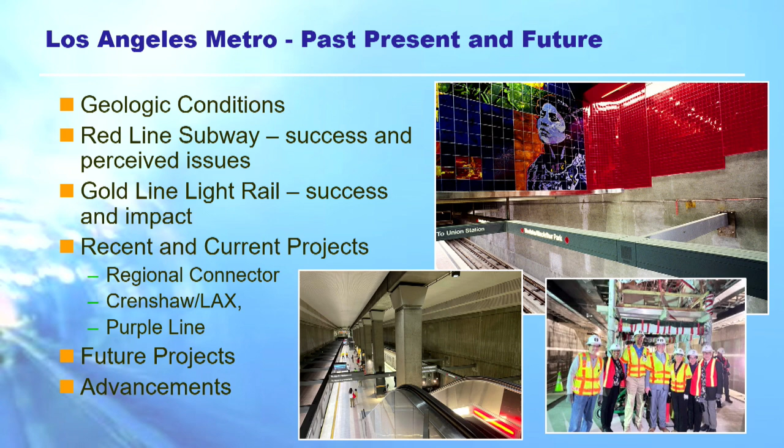Okay, Matthew. Okay, let's get cracking. We're going to talk about LA Metro, past, present and future, a bit about the geology, go back to the 80s with the Red Line, to the noughties with the Gold Line, and then the 2010s, 2020 with Regional Connector, Crenshaw and Purple Line, which are recent and current projects. A little bit of chit-chat about future projects, so you can put it down to a bit of BD tonight. And then some of the advancements and things that we've learned from our 40-year program.

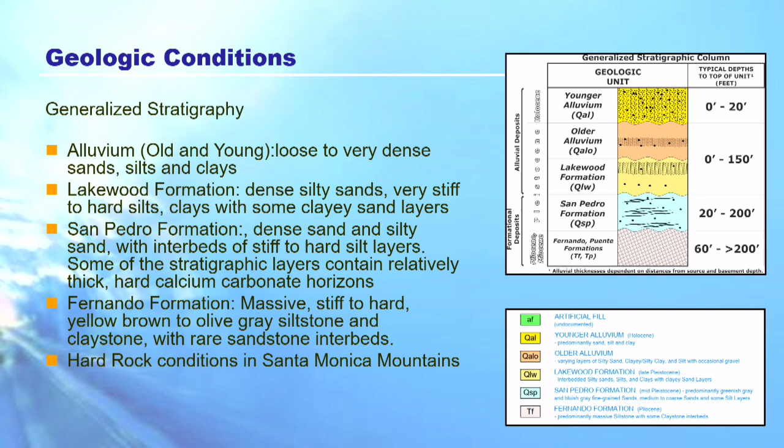LA actually has quite a big history of tunneling over the last 150 years for railroad. Here we go, railroad, transit. Where are we? There. Freeways, highways, and water and sewers. So it's not a new thing to us.

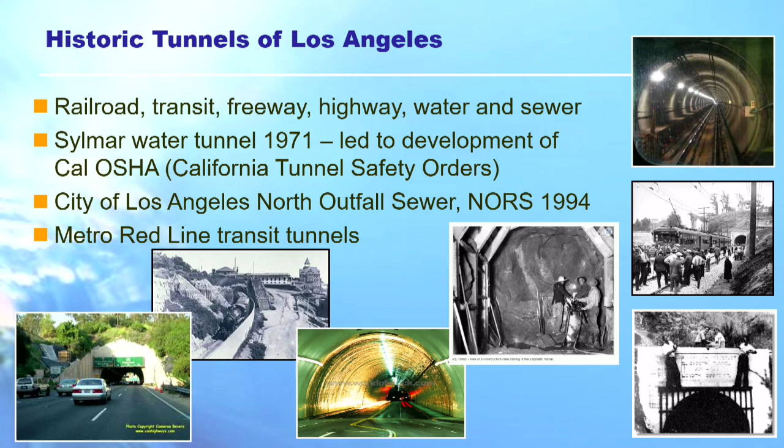Also, Los Angeles, the reason why it's so spread out is not the freeways. Again, you can see the mountains and then the west side and then the San Fernando Valley. But you can see that the red and the blue lines are railroads, either the streetcar type thing, or actually this is a 4-track electric commuter rail. And it originated from the horse-drawn tram with a particularly lazy horse there.

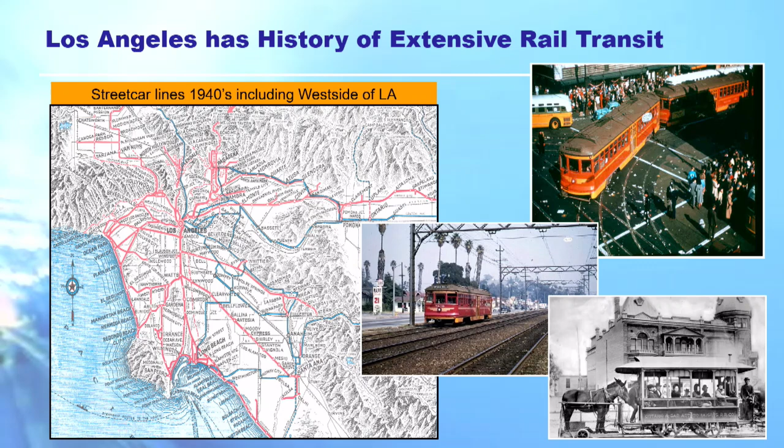And as with all good things, when the system had been completely abandoned, there were no tracks left, we kind of thought about how to put them back again, back in the 60s. And, I can't think. Amanda's going to talk about some sensible stuff now.

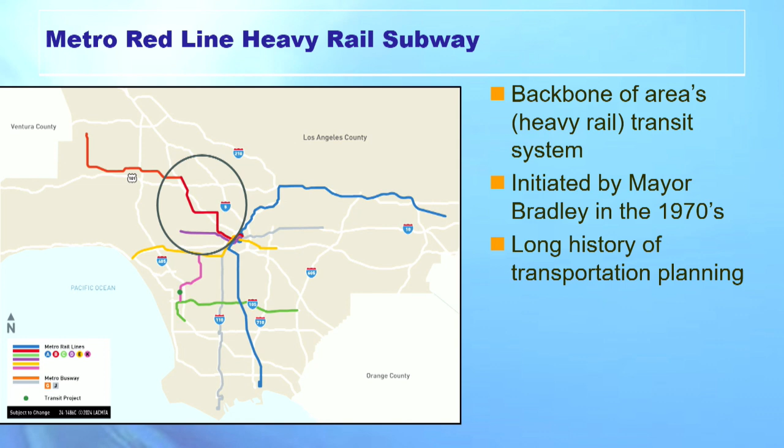Amanda. Started by Mayor Bradley in the 1970s. If anybody flies into Los Angeles, they fly into the Bradley terminal. He was a promoter of transit. But there is actually a long history of planning for the metro systems. There are a lot of stops and starts for funding.

They finally came up with a new approach where the state created the Los Angeles County Transportation Commission to sort of coordinate all of the municipal operators and have more efficient funding. So in 1980, the voters of Los Angeles actually voted for a half-cent sales tax to help fund transit projects.

And a locally preferred alternative emerged from downtown Los Angeles along Wilshire Boulevard up Fairfax and out through the Santa Monica Mountains to the San Fernando Valley and actually connect these population centers.

There's no screen here. All right, yeah. Do you know about this, Gabor? There's no screen. So I'll keep going though while they repair that.

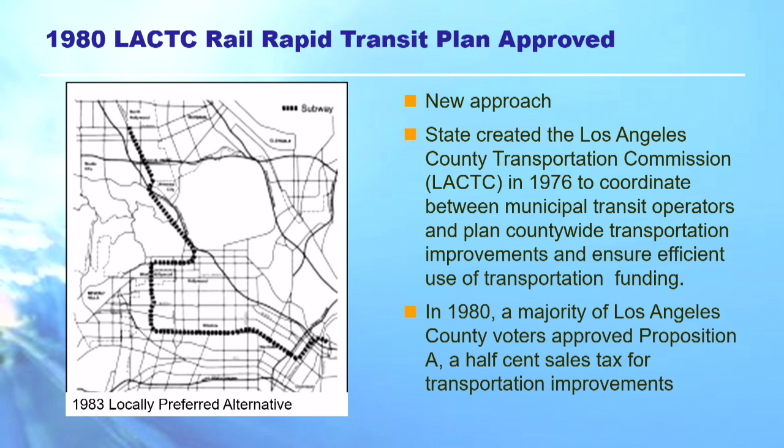But this alignment was not really to be in that form due to the presence of gases underground. Yeah. There are many oil fields in Southern California. Actually, at the turn of the 20th century, it was one of the major oil producing cities in the world. And there's one particular area along Wilshire Boulevard that's very famous called the La Brea Tar Pits. And in this area, oil actually seeps out of the ground.

Anyway, in this tar pit area, mammals from the ice ages would come, they were attracted to the tar thinking it was water, get in there, get stuck, and actually perish. And so there are many, many prehistoric ice age fossils that are being recovered from these tar pits. There's actually a museum that's a famous attraction. You could go see the fossil remains.

But because of a non-metro related incident in 1985, the alignment had to be realigned around this tar pit area. The incident was a methane explosion under a department store slab. Nobody was killed, but it was quite sensational. And as a result of that, the city of Los Angeles created a methane zone, which you can see, here's the explosion area, the tar pit area, and the alignment had to be rerouted around that methane zone.

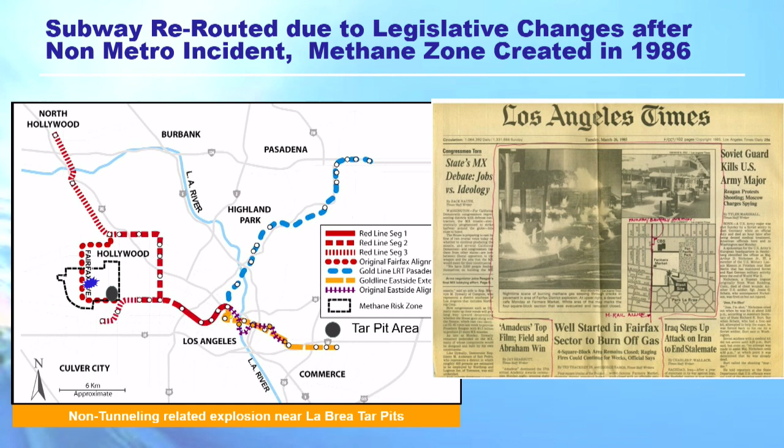And the United States Congress actually voted legislation to not fund any metros in that zone. So, not going on Wilshire Boulevard in 1986. The original methane zone was about 1.5 miles by 1 mile square. Sorry about the American units, but at least you guys have heard of it.

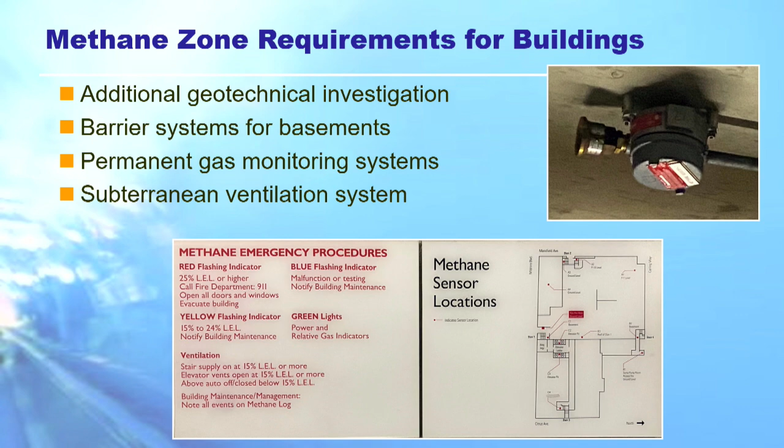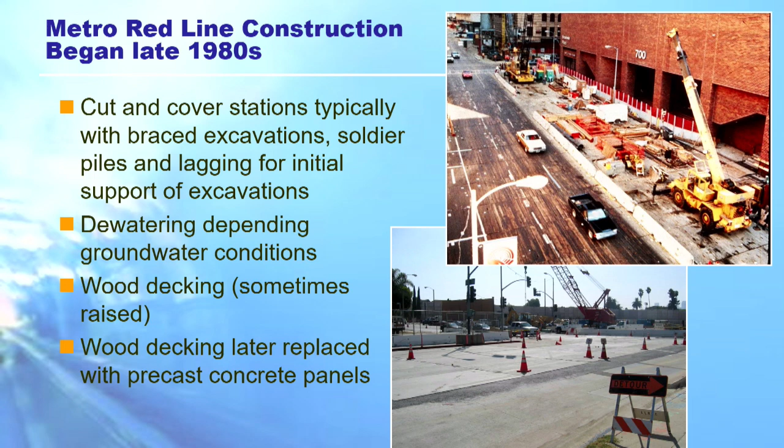So Metro Red Line construction began in the 1980s. It was mostly cut and cover stations, braced excavations, soldier piles and lagging, dewatering depending on the groundwater conditions at the station locations. They used wood decking over the open cuts. This was not popular with drivers. Sometimes the decking was raised to reduce utility relocations. So that was later replaced with precast concrete panels.

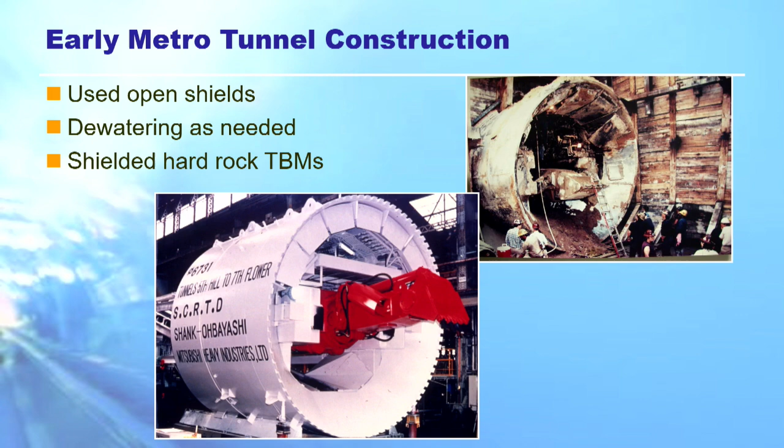Tunnel construction used open shields, except through the Santa Monica Mountains where hard rock TBMs were used. It's a photo of the rock machines. These were named Thelma and Louise to give you an idea of the time frame of this tunneling. And the initial ground support was rock bolts and sometimes steel ribs. And the final lining was

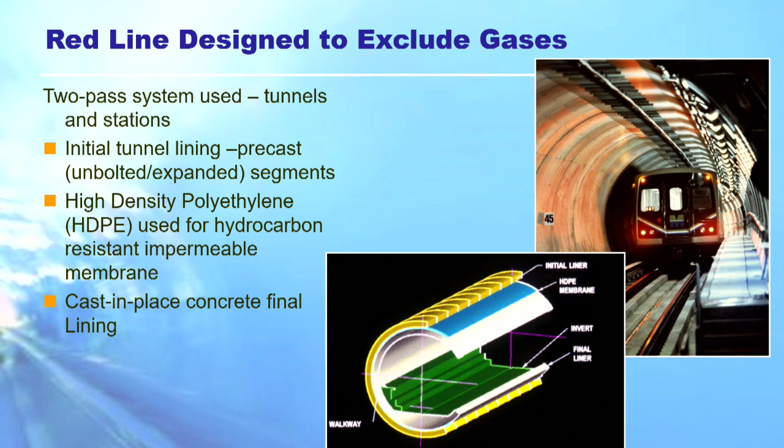cast-in-place concrete. So we mentioned methane in the ground, so we had a design for mitigating methane. The Red Line design included a two-pass system, which was an initial precast concrete segment, expanded lining, no bolts, followed by a high-density polyethylene liner. That's called HDPE, and that's used because it's methane resistant. A lot of testing was done to confirm that, followed by a cast-in-place concrete lining. So we're basically sealing the tunnel.

For tunnel construction in gassy ground, and I was happy to see Donald Lamont here too tonight, we follow these California safety orders that we mentioned. These safety orders require that methane has to be diluted to less than 5% of the lower explosive limit. There has to be continuous monitoring during tunneling, and equipment has to be approved by MSHA, the Mine Safety and Health Administration, a federal agency. And the equipment must be certified to be intrinsically safe or non-sparking.

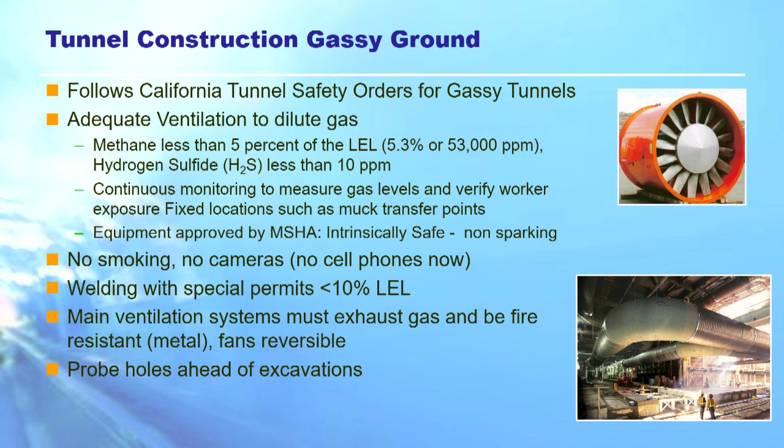It should go without saying that there's no smoking allowed in the tunnel. You'd be surprised. But also no cameras, no cell phones, unless they have special covers. The main ventilation systems have to exhaust gas and be made of rigid metal. And most of the time we have to maintain a probe hole ahead of the tunnel face unless a variance can be obtained from Cal OSHA.

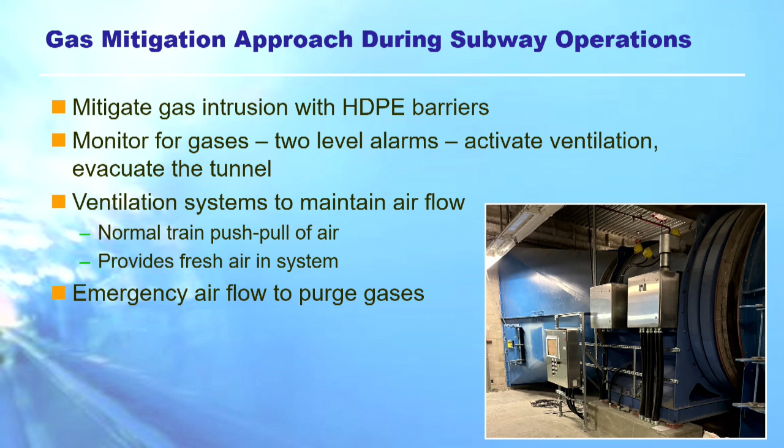So during operations, some similar mitigation approaches, I mentioned the HDPE barriers. We also have continuous monitoring for methane and hydrogen sulphide gases in the tunnel. There are alarm levels for a certain percentage of the lower explosive limit, and then fans are activated if they detect, I think it's 10 parts per million. And then at a higher level, the tunnels have to be evacuated. Normal ventilation from the train push and pull keeps any small amounts of gas diluted to acceptable levels. And of course, there are emergency fans if there are fires or higher gas levels.

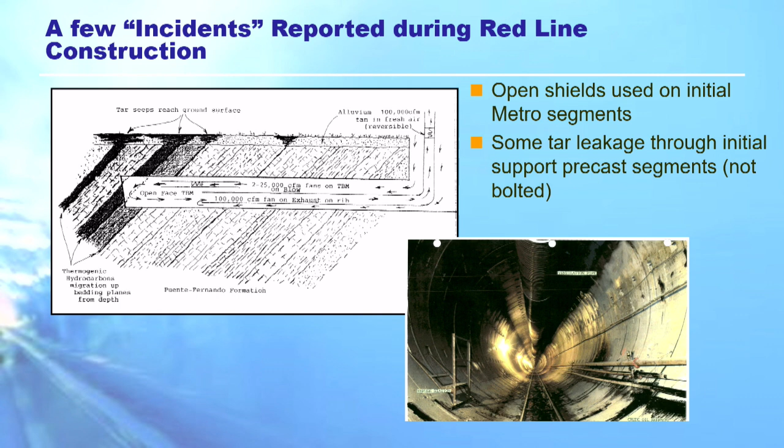HDPE is also used for the station barrier systems, and welds have to be tested extensively to make sure there are no breaches in the lining. So spark testing or vacuum testing is used on those welds. There were a few incidents reported during the Red Line, so you can see this is the same sketch. But generally speaking, things went well. In this case, there was actually some tar that leaked through those initial precast segments in a section of the tunnel just west of downtown Los Angeles.

Other challenges from geology include earthquakes. Metro developed a two-level approach for seismic design: an operating design earthquake, which has a 50% chance of occurring in 100 years, and the structure must be designed to have no damage and be able to go back into immediate operation after a brief inspection. And then there's a maximum design earthquake, which is a larger earthquake or more ground deformation, with lower probability of occurrence though. In this case, the structure must be designed to maintain life safety, but may be repaired.

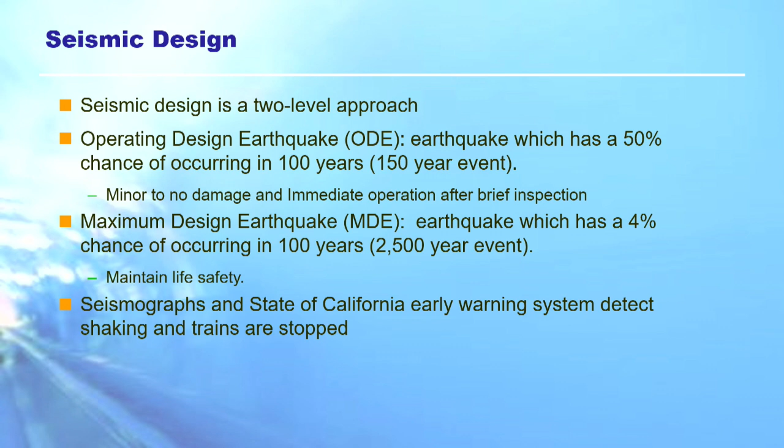Also in operation, there are seismographs in many of the stations, and the state of California has an early warning system, and either of those will detect ground shaking or acceleration, and trains are stopped.

Soft ground also posed some challenges for the open face shield tunneling. Most of the time things were just fine. However, there was some surface settlement due to ground loss, and this led to some media attention. The picture on the right is the Walk of Fame on Hollywood Boulevard, and some of the famous terrazzo sidewalks with the stars settled, and people complained about that. And about the same time as the Heathrow sinkhole, there was one along Hollywood Boulevard. This was not due to shield-driven tunneling. It actually occurred during remining of a tunnel that went offline.

I meant to mention too on the sinkholes that I think Shani Wallace is here. Matthew reminded me that she had some good articles in the archives if anybody wants to follow up on those.

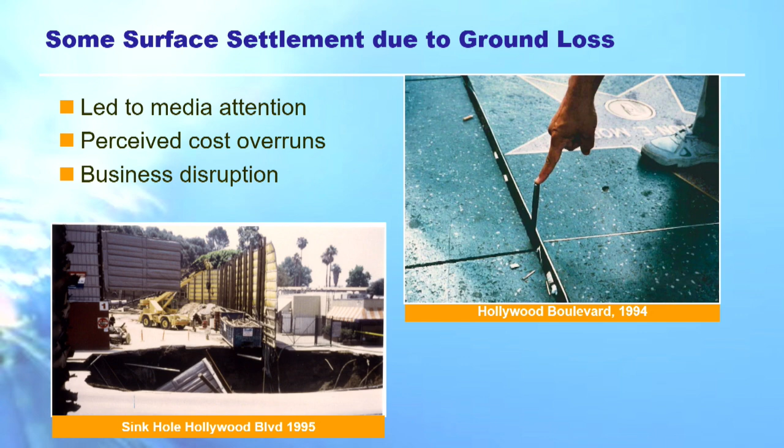One other notable experience was a tunnel fire. This was early on in the Red Line construction under the 101 freeway there. East of downtown, it's a tunnel that actually went to the yard leads. Wood lagging was used, it caught on fire. This freeway was closed for a little while.

So now no wood lagging is allowed in the tunnels, but fortunately the chief engineer, Jim Monsees, had specified permeation grouting under that freeway, so the freeway did not collapse and went back into service shortly after a few days.

So because of the public perception of construction issues in Los Angeles, like, is it okay to tunnel there? The Metro created a tunnel advisory panel. And the members of this panel, some of you may know or have known Harvey Parker and Dan Eisenstein. They were ITA presidents, and their charge was to study tunnels worldwide and compare the experience in Los Angeles to those.

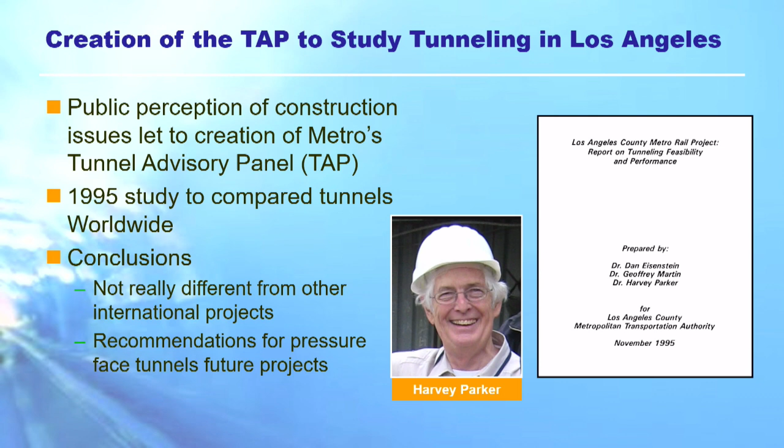And not surprisingly, they concluded it's not too different from anywhere else at that time, but they did recommend that pressure-faced TBMs be used in the future. So Red Line was completed in about the year 2000. Technology advances were recognized. The design criteria for seismic design, gas barriers, gas mitigation, and the subway operates safely.

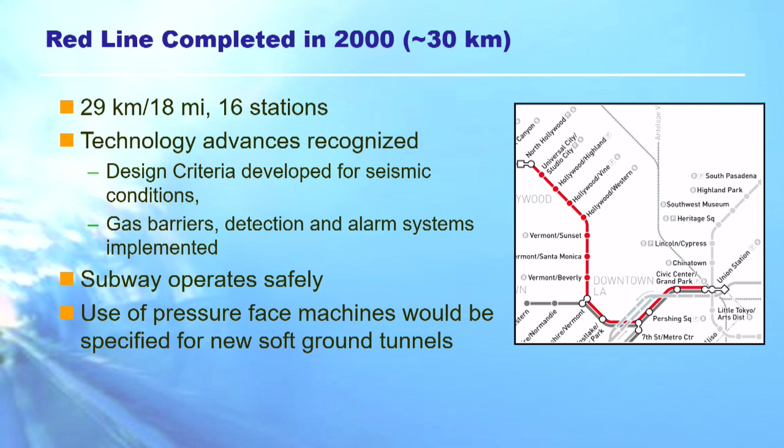Just a few pictures of the completed stations. This is the artwork. It represents the diversity of Los Angeles County and the local industry, the film industry. Each station has a different theme.

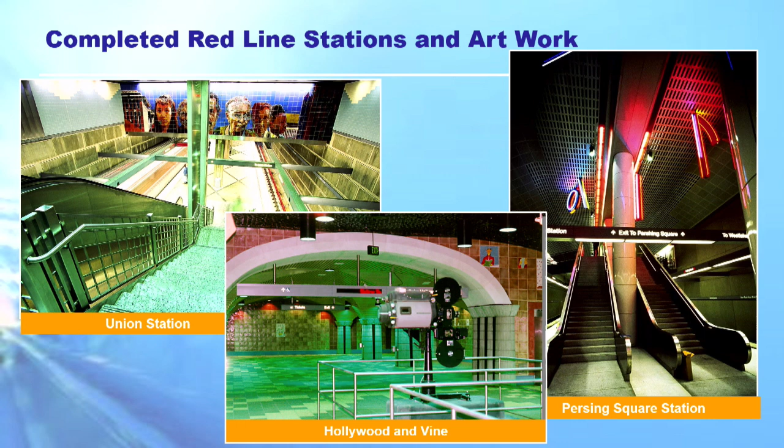But despite the Tunnel Advisory Panel's findings, subway construction was stopped in 1997. And the voters actually went the other way and said, no, we don't want to spend any more sales tax on subways. Some politicians had just been to Brazil and they decided that busways were the way to go.

So the East Side Heavy Rail project that was planned was put on the shelf, but it actually reemerged as a light rail line to East Los Angeles. And we were able to use the TAP recommendations for pressure-faced machines. And the success of this East Side project was really critical to get the tunneling moving again on the west side.

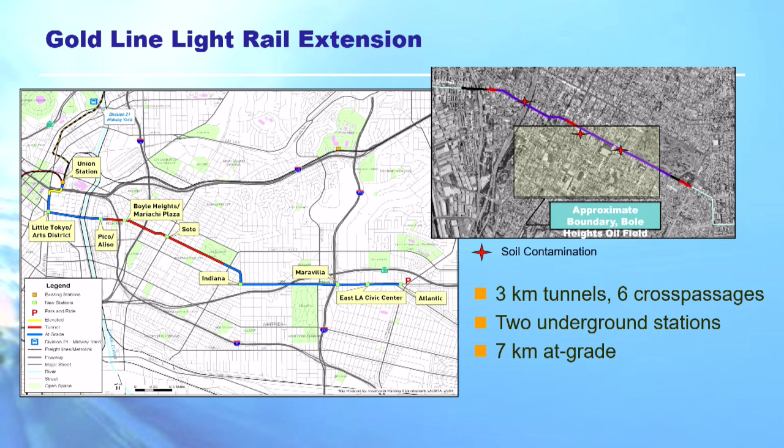So this Gold Line project on the east side was also through an old oil field. It only had 3 kilometers of tunnel and 2 underground stations. But the TBM specifications were written for either slurry or EPB machine to operate in the geologic conditions there in gassy ground, made sure we had tail shield grouting and all the stuff we talked about back then. But it could be used with a single pass liner.

And I should point out that Matthew Crow gave me a copy of the draft BTS specifications back then, so we were actually able to take advantage of those. Thank you.

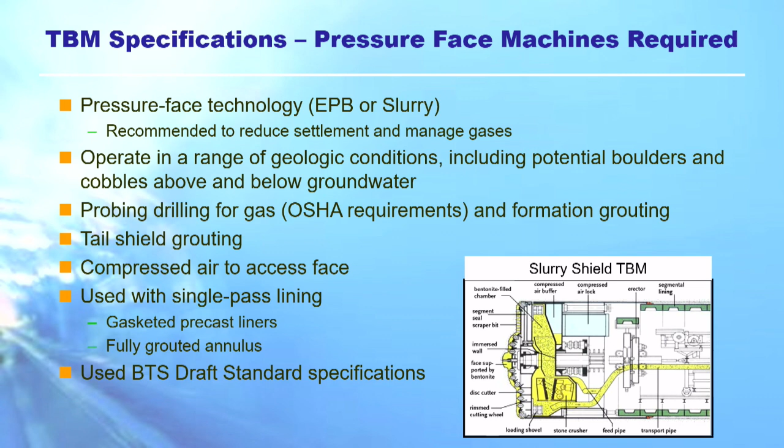Precast concrete segmental tunnel linings were about 5.7 meter diameter, single pass, but they had to be designed with sort of the same concept as a redundant system with 2 types of barriers. So they were designed with a double gasket and a convex to convex radial joint. So they'd actually rock during a seismic event and the gasket would always be sealed.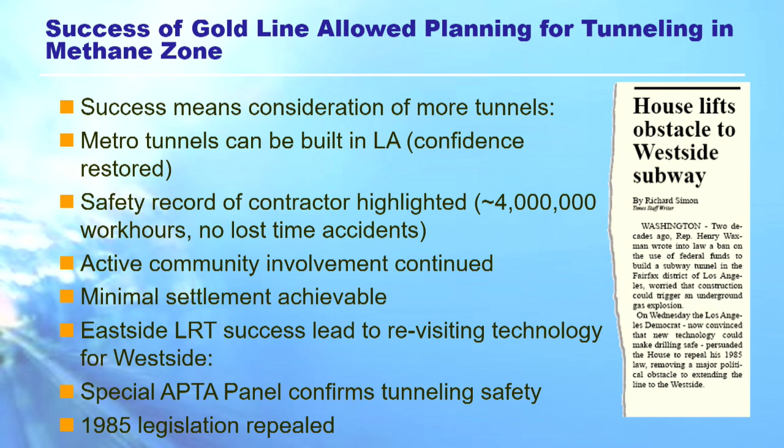And again, success of this project is what allowed us to go forward and eventually get the congressional ban on tunneling lifted. It wasn't just the lack of settlement, it was also the contractor's safety record, a happy community, and the input of a special APTA panel that I'll talk about when we get to the Red Line. And this kind of swayed voters back the other way. They were probably tired of sitting in traffic as well, but in November 2008, they voted a half-cent sales tax again for transportation upgrades for 30 years.

And then in 2016, another half-cent sales tax to extend the sales tax from 2008. But this alone wasn't enough to fund the subway. It also gets federal funding and other local funds. So I will turn this over to Matthew.

Okay. Thanks, Amanda. So let's talk about some more recent projects. What are we talking about? 2010s and 2020s. Regional Connector, Crenshaw, and then the Purple Line extension, which is the jewel in the crown of Metro. Crenshaw LAX, it's a light rail thing. So light rail, what do we mean by that? It's a bit like the British Rail, Merseyrail trains, except they're able to do street running, and it's got overhead power. So actually more like Newcastle Metro.

It's got 3 underground stations with twin bore tunnels connecting them. And it's over in this part of, there's the airport there, the sea. And this is the Crenshaw district. It's famous. That's where Meghan Markle comes from, whoever she is.

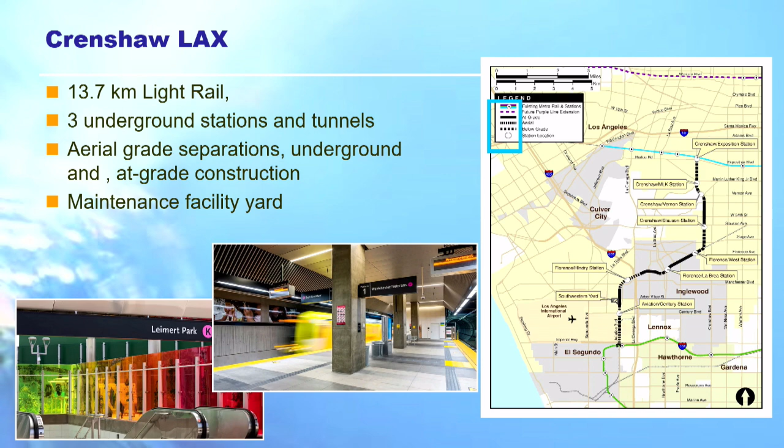Okay, a bit about support of excavation. Again, braced, we did braced, it's standard to all of our system. Braced excavations with steel pipe struts and steel soldier piles, top-down construction, concrete road decking. We'll talk a bit about that later. And one of the things that's really important is we have very prescriptive Metro Rail design criteria and standard drawings for shorings that we make sure our designers follow and our constructors implement. And when we do that, we don't have any mishaps. It's very, very important to us.

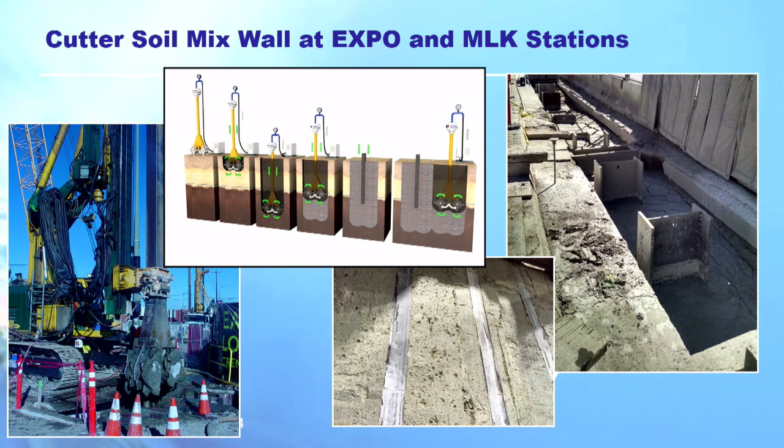Two of the stations were built using the cutter soil mixed wall to build the walls. Some of you might not be aware of this system. Essentially, it's a rotating cutter head here, cutting a big trench here, filled with bentonite, cuts it all up. And then instead of the soil being removed, we displace the bentonite with cement, and it mixes to produce a soilcrete. And before it sets, we push in these soldier piles from the surface so that we've got the steel piles. And then that's the finished product. You see the steel soldier piles, and that face is just cut with the back of an excavator bucket.

The reason why I mention this is we actually had an academic, so it's not just Matthew Crowe picking the numbers he likes to show off. They actually did some proper research. And they compared the two systems: with the conventional soldier piles and timber lagging, wall deflection was 25 millimetres and surface settlement about half that. Not too shabby, you know.

When we use the cutter soil mixed walls, we have a wall deflection of about half, and then, you'd think all the same, but we actually had heave. And the reason for that is because the wall was so stiff, there isn't much wall deflection, but when you dig a great big hole in the ground, you get this elastic relief, and then the ground next door comes up. So that was an interesting thing that we discovered.

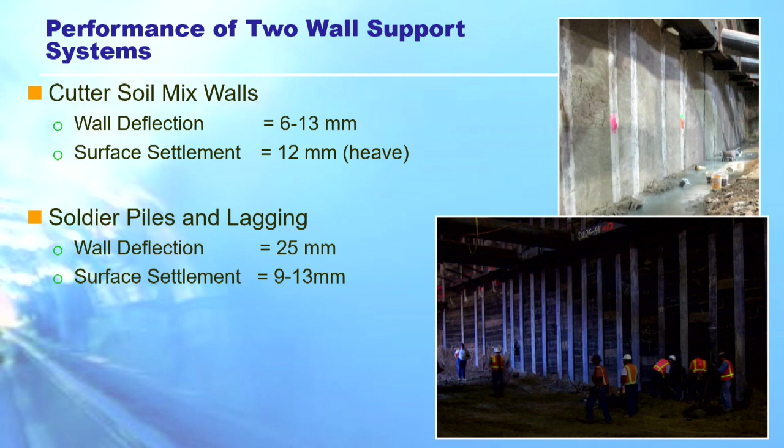The other thing we did is, Amanda mentioned the HDPE waterproofing system. That's the only material we can use, and it's very difficult. But we improved the system by compartmentalisation in 10 square foot compartments with this water bar here. There's a regroutable hose around each compartment, so we can re-establish it if the compartment leaks. And at each compartment, you have 4 grout ports. And the reason we do this is not only to fix anything during construction, which we did on Crenshaw to make a beautiful, dry station for our operations folks, but it also enables any midlife refresh.

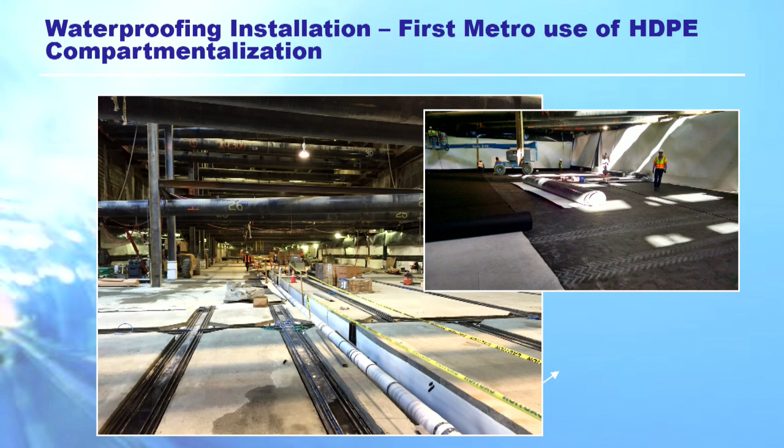Something we're very proud of here, Dr. Ed Cording had the Muir Wood paper, the ITA, on this subject. He's very proud of this, and so am I. So I won't say it's my idea. But it was a new innovation to Metro, so that's how I look at it.

We used, again, double gasketed segment, but the enhancement we did here on Crenshaw was we put a cross gasket on the seat joint. These segments were designed by John Hurt of Arup, who actually does some work in the States. Great engineer. So note that location.

And the reason we put the cross gasket in is so that we compartmentalise the tunnel in 1.5 metre lengths, so we can do future grouting in the gap between the two segments in a meaningful way if we have future leakage or something happens, so that we've got a tunnel that will last for kind of ever.

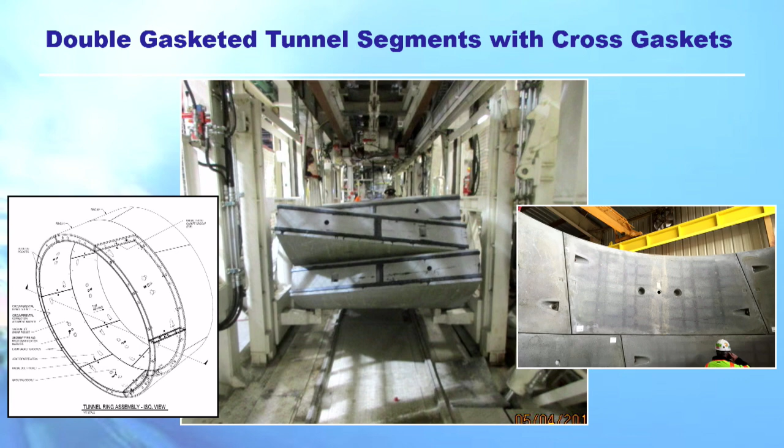You know? Regional Connector, another light rail project. It's downtown Los Angeles, 2 miles of tunnel. We have 4 light rail lines that weren't connected. This connects them all up. It's got 3 underground stations. Super project. But we're not that interested in the project. We're interested in the tunneling, of course.

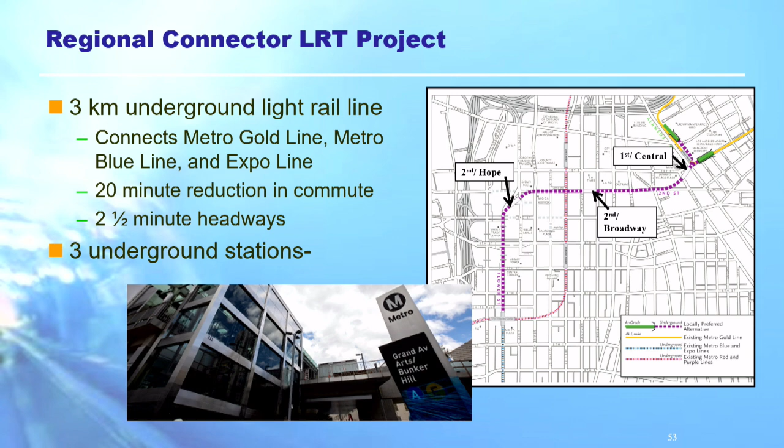So the first part of the tunnel has about 1.5 diameters overburden here, and it's in slop below the groundwater table, so quite tricky tunnelling. And there happens to be a very culturally sensitive building above, so we mandated the installation of compensation grouting tubes, and doing that compensation grouting enabled the tunnel underneath this complex of buildings with nominal ground movements.

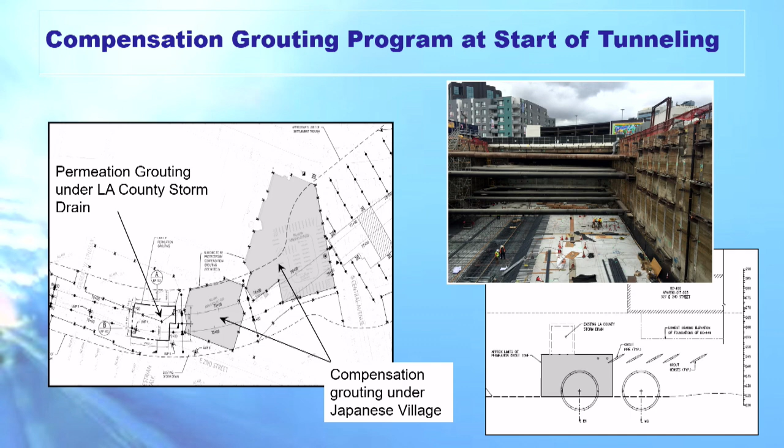Another interesting feature was with crossovers, typically cut and cover structures, but here we have the Los Angeles Police Department building, the Higgins building, and just here that's where Sir Colin Barrett, one of our great engineers, happens to live. Not only the tall buildings, but they also have basements that extend over into the street. There's also a large diameter storm drain. But thankfully, instead of being this alluvial material, we have the Fernando Formation, which is the siltstone, claystone.

So it enabled us to, for Derek Penrice of Mott's, that's what he does, he does these pretty coloured cartoons. And, okay, it's not like the crossover tunnel on the Channel Tunnel, but to us it's very special, you know. So we've got this lovely cavern with sequential excavation. We're careful of the naming. We don't call it NATM or anything.

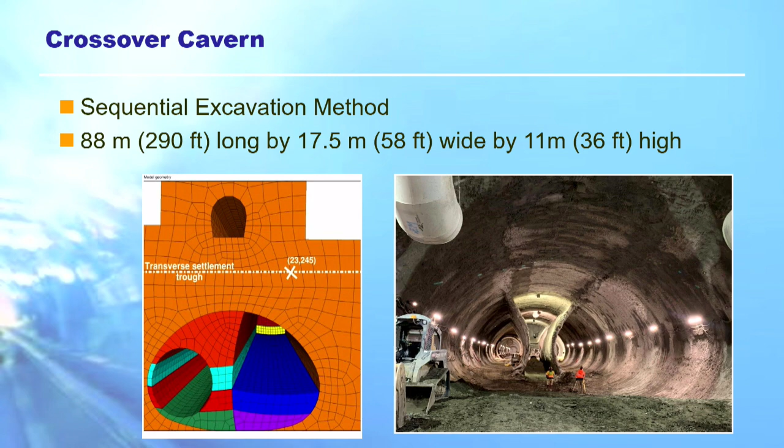And it's, what is it? 90 metres, 88 long, 18 metres wide, and so it's pretty impressive. But you can't see it. It's all filled with ventilation and stuff now.

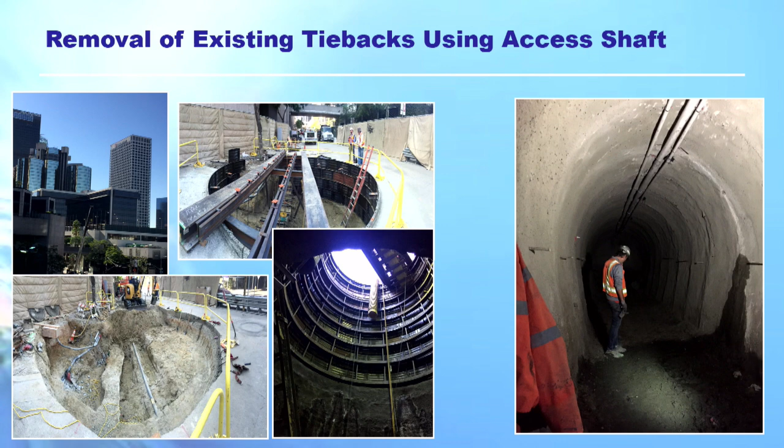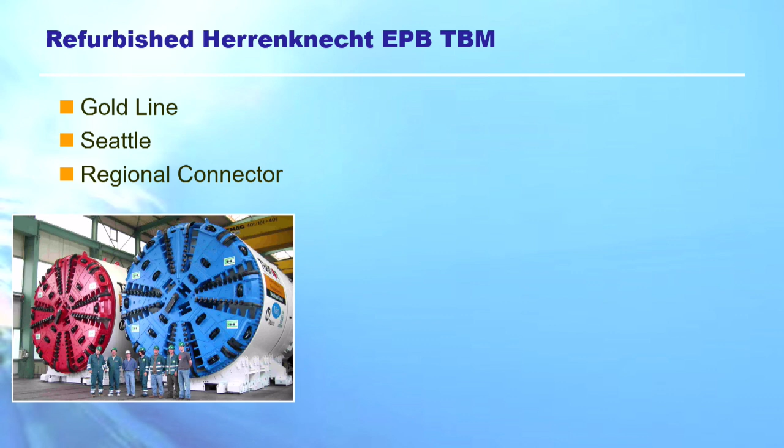Here we go. Same TBM, but it's had a bit of makeup there, as you can see, up in Seattle. And then the TBMs for Regional Connector. It's had a bit of a face work and a nose job there for Regional Connector. So that's kind of interesting. Yeah, you're supposed to say, yeah, it's interesting.

What about the projects? These are real projects, very useful, and they enable, you can get from Azusa, it's like 25 miles from downtown, goes through downtown, actually goes down to Long Beach, it's a big city, it's on the beach there, and then from East LA, that's the Amanda project talked about, through downtown to Santa Monica Pier, which is all rather nice, and you're all connected.

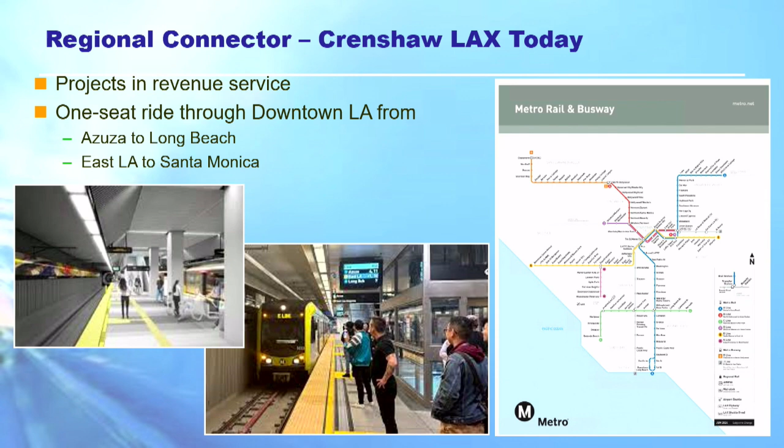Purple Line, so I'm going to hand over to Amanda again. Okay, I'm back. All right, so the Purple Line project is one that's actually in construction today. It is being built in 3 sections, 1, 2, and 3, very original.

And it goes from the end of the existing line, it's now the Purple Line here, out to UCLA, that's the University of California, Los Angeles, and the Veterans Administration Hospital, and there are a lot of Olympic venues. Los Angeles will host the Olympics in 2028, so I'm sure some of you understand the pressure of getting things finished before the Olympics.

The project also goes through a number of jurisdictions, the City of Los Angeles, City of Beverly Hills, federal land, and some state property. So there's a lot of coordination to do with third parties as well. Planning began in 2007 and projected to finish construction of Section 3 in 2027.

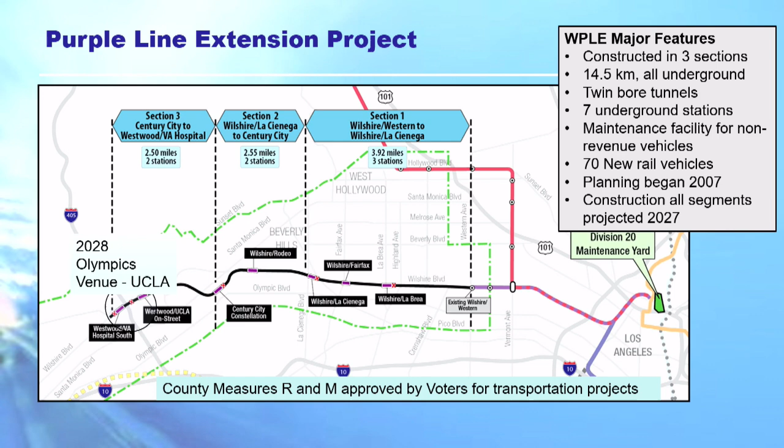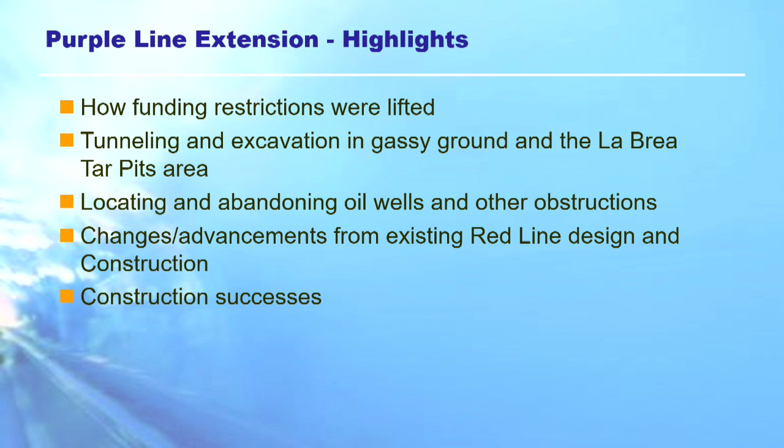So just a few highlights from this project will be, how did we lift those funding restrictions that were on Wilshire Boulevard? A little bit about how the tunneling went and the gassy ground around the tar pit area. We had some oil wells that needed to be located and abandoned before tunneling. Some of the changes and advancements from the existing Red Line, and Matthew will talk a little bit about construction successes.

So how were the funding restrictions lifted? Basically through more information, the success of the Gold Line proved tunneling could be done, and other improvements in technology. Besides pressure-face TBMs, we had looked at some gas extraction methods to reduce gas in the ground during tunneling, and better monitoring of the environment.

And also, we had another panel called into action that was called the APTA panel, the American Public Transportation Association, and they will help supply you peer reviewers for whatever type of problem that you have. So this panel was called in 2005, and they concluded, based on all the data they had, that it would be safe to tunnel in the methane zone area. However, only slurry TBMs would be allowed because they could contain all the gas in the tunnel and it gets released at the surface. And we should maintain the 2-pass lining system.

So based on that, the United States Congress reversed the legislation. But we had then a follow-up panel in 2012 after a lot more geotech exploration had been done. And the panel said, yes, EPBs can be used, especially considering that there was a lot of siltstone in some of the tunnel reaches, which would be difficult to process. And that if we could develop a 1-pass liner system that had the ability to add a second liner in the future, then that would be acceptable.

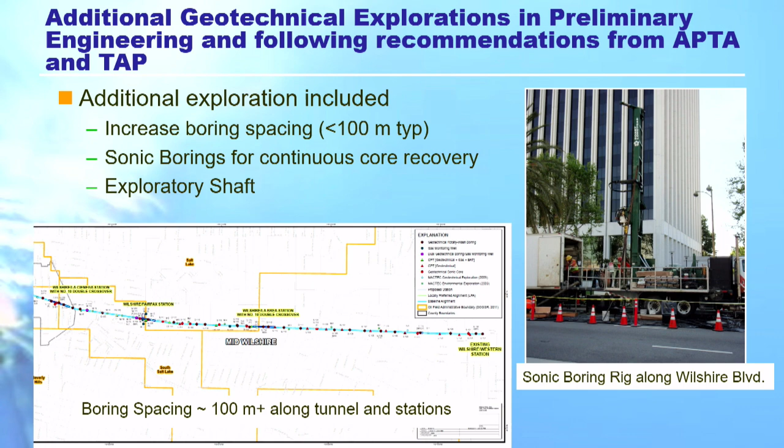So some of the additional investigation included decreasing the boring spacing to less than 100 meters, continuous core borings, and this panel also recommended that we do a large exploratory shaft.

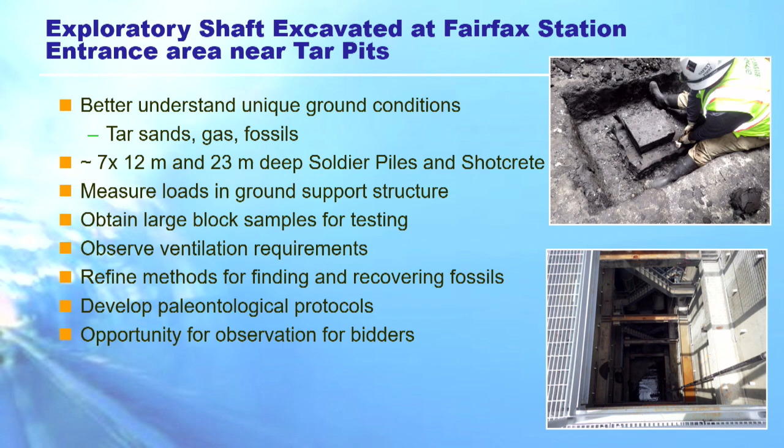So the exploratory shaft was considered very successful. It was a 7 by 12 meter box, 23 meters deep, and it was constructed with soldier piles and shotcrete lagging. And from the shaft, we could obtain large block samples to test for soil properties, observe ventilation requirements, refine methods for recovering fossils, because those were expected throughout this area wherever there was tar, and develop protocols for working with the paleontologists. And at one time, the bidders could come and look at the shaft before they prepared their proposals for construction contracts.

So paleontology had to be considered in the contract documents. The GBR had a paleo layer, and in that paleo layer, excavation could only occur within 6-inch or 15-centimeter lifts to avoid disturbance of fossils. So that did slow things down, but that was to be included in the contractor's bid. There was a paleontologist on site at all times during excavation to keep an eye out for anything interesting. And we did find numerous Ice Age fossils and coordinated those findings with the county museum.

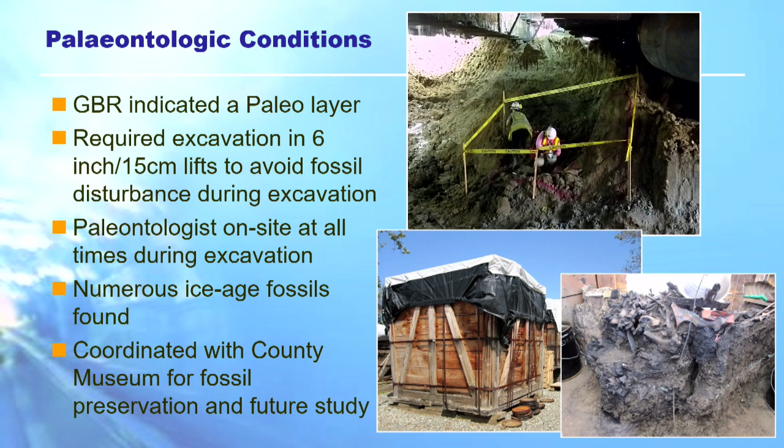The final geologic profile for the Purple Line had all of our friends, Old Alluvium, Young Alluvium, Lakewood, San Pedro, and a bit of siltstone on the east side. And here it's kind of interesting, in the Wilshire-Fairfax area, this red line represents the top of the asphalt impregnated soil in that Wilshire-Fairfax area.

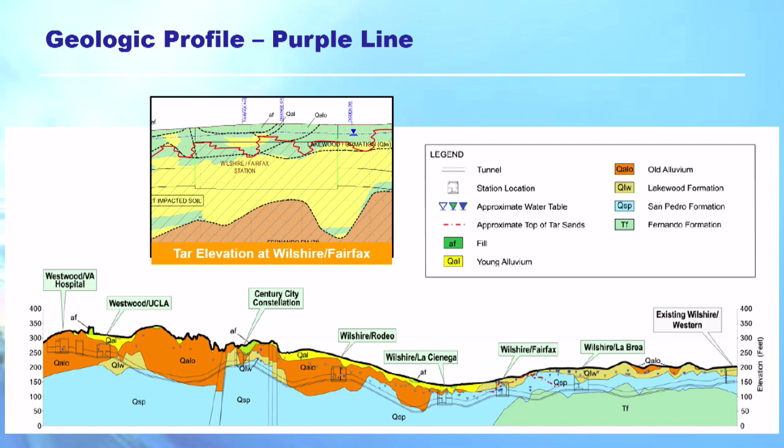So the TBM was remarkably similar to the TBMs used for the Gold Line regional connector. It was a new TBM though. There were actually two in each section for construction. And the tunnel lining was also a one pass with this provision for a second lining. And one of the improvements was the double gasketed system with cross gaskets. A little bit different though from the Crenshaw one. I'll show you some pictures.

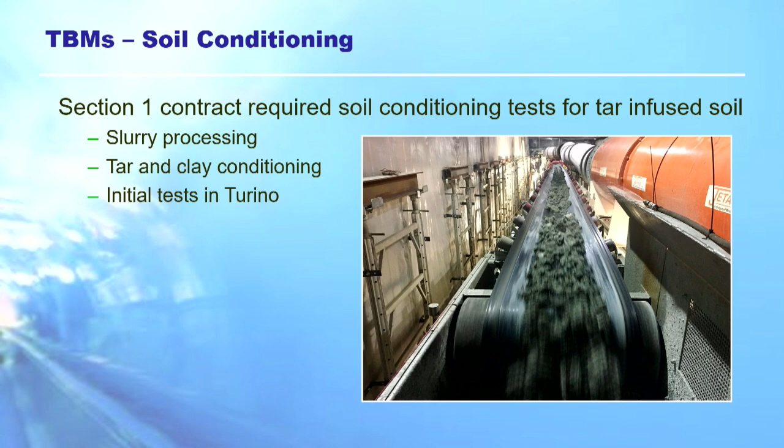The contract also required additional soil conditioning for asphalt-infused soil. And some of the initial tests we did were actually at the University of Torino, so we shipped soil over to Italy for testing. And it actually wasn't too problematic. Just a few pictures of TBMs coming through the station. You can actually see them here.

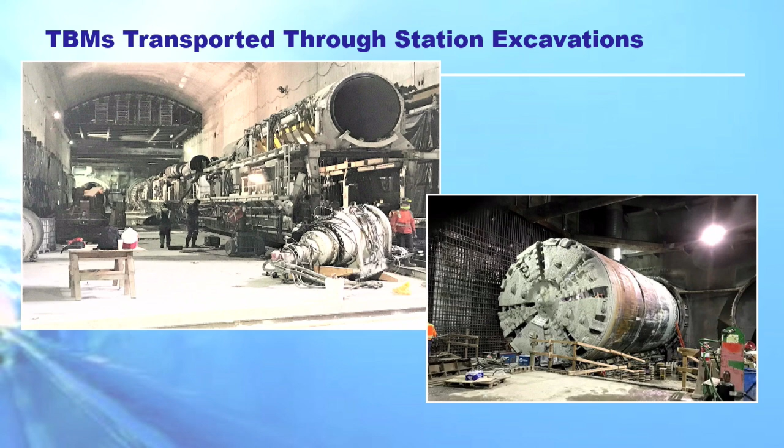And I also wanted to highlight, this picture shows our station arch. One of the things that changed from the Purple Line was that we removed the columns from the stations and had a slightly narrower station with an arched roof. So the single pass linings here were the same size as the Gold Line, but the heavy rail system has about a foot diameter difference from a light rail line, so came out to the same size.

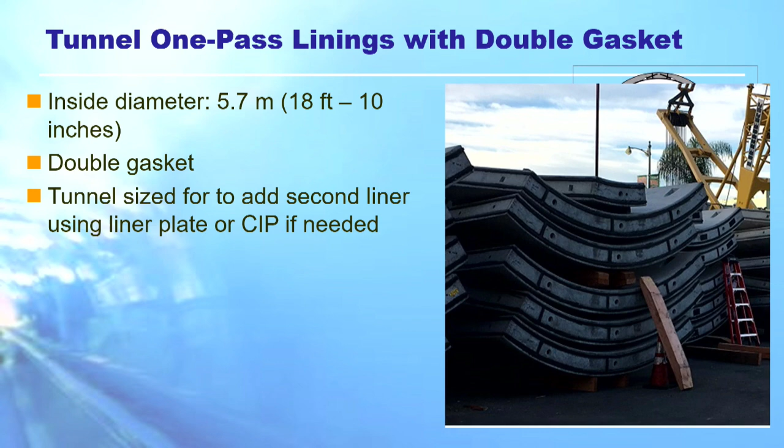And here you can see that the cross gasket for the Purple Line is actually on the circumferential joint. And Matthew has now codified the location of the gasket in the Metro criteria. And I mentioned the tunnel was sized to add the second liner. If in the future there was leakage of gas or water, you can add a second liner, not easily, but because you have the space for it. Tunneling went very well.

Average settlement was less than allowable. Some of this tunneling was in some pretty sensitive areas like the city of Beverly Hills. Bentonite shield gap grouting was deemed to contribute to reduced settlement where it was used. Not all of the contractors chose to use that shield gap grouting. So the tunneling in the gassy conditions also went well.

However, there were a few exceedances of the OSHA allowable limit for gas in one reach of the tunnel. In these cases, workers had to evacuate the tunnel until OSHA could give them the all clear to return. That was generally an hour or two. Also, the station workers had to evacuate as well because those are connected.

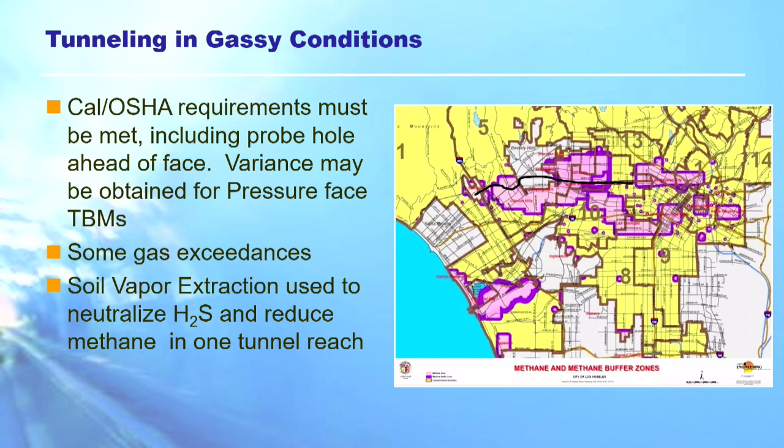In reach 3 of the section 1 tunnel, we also did something very interesting, which is soil vapor extraction. This had been in planning for many years, but actually came to life here. And the concept is the air is injected in some wells and extracted in others, and it can actually neutralize hydrogen sulphide gas in the ground.

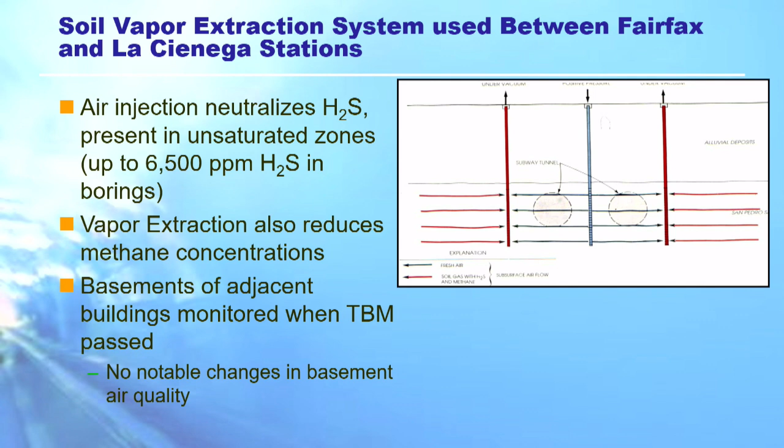In one area, we had 6,500 parts per million of H2S, which is quite hazardous, not explosive, but immediately dangerous to health. Methane levels are 100% in the samples taken. So methane is also reduced by this method. So by activating a vapor extraction system, tunnels could go through this area with no issues. We also monitored basements of buildings in the area to make sure there were no changes in the air conditions in the basements, and there were not.

We've got the final few slides, because, you know. Do you think I'll pinch it or something?

It's nice, it's nice. Anyways, quick about station construction, the same old thing, all the same stuff that we've been doing for 35 years. But of note here, remember COVID? It was awful, wasn't it? But there were some good things.

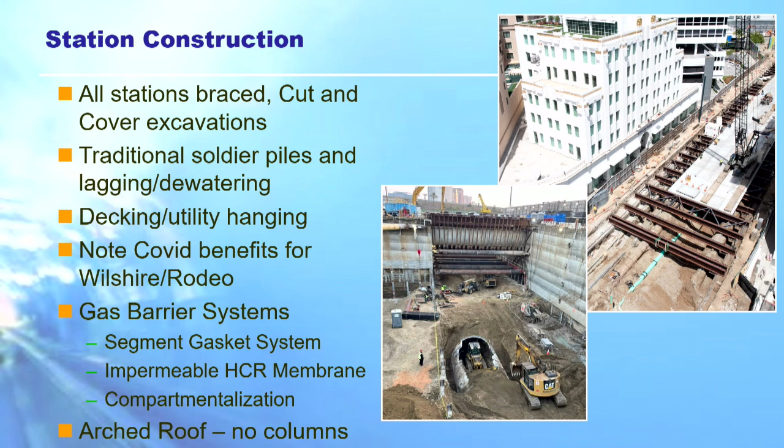And then I like this picture. Obviously, we built the tunnels first, and you can see us breaking in, and I guess they look about in the right place, thankfully. The other thing of note is the arched roof, which we mentioned, and I'm mentioning it again, which I said I wouldn't. Oh, well.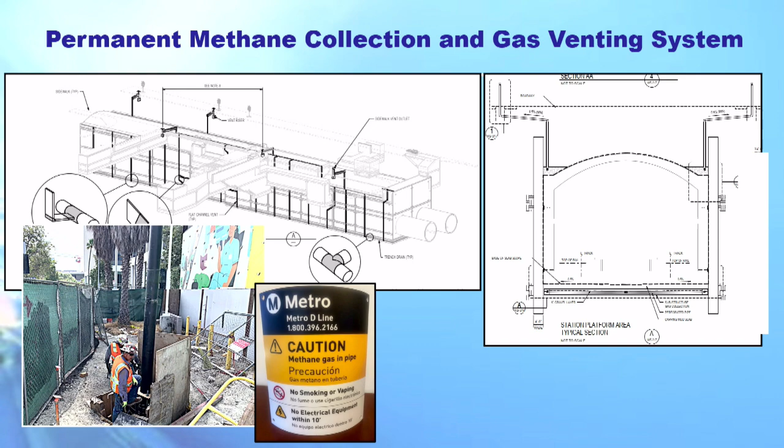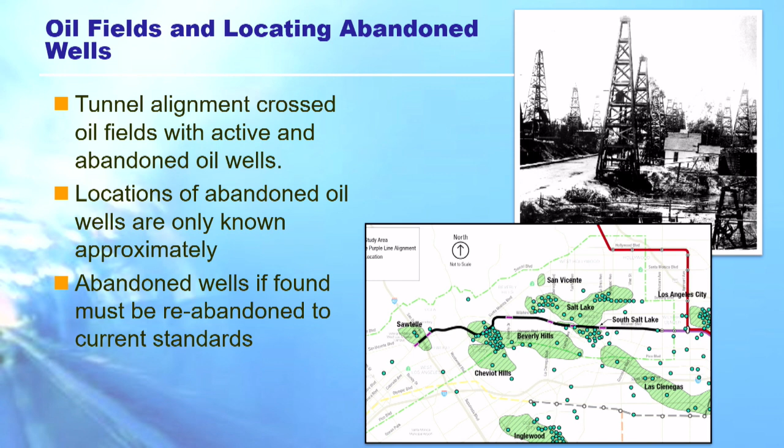Oil fields, yeah, a lot of oil fields. LA was basically built on the back of oil fields. We know roughly where they are, but only approximately. And any abandoned wells have to be abandoned to the latest standards if they're in the way. This is Beverly Hills High School. That's where Monica Lewinsky and Lenny Kravitz went.

There were 19 operating wells in the area. This thing is actually part of the operating well. It's actually a drill rig hidden behind this thing. They were abandoning them as we were doing our project. And we did horizontal directional drilling with a magnetometer to locate where the wells were. Three holes and triangulation. You can work it out, can't you? Dave Hindle's figured it out. He's sitting there.

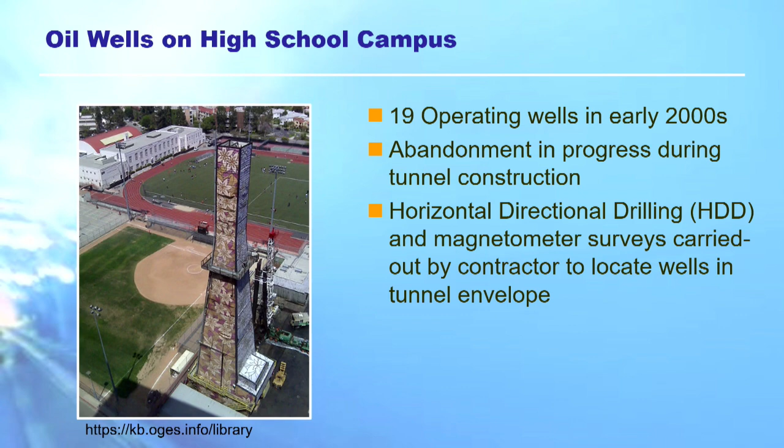We actually found 2 wells, and there we are, abandoning them. And again, COVID was our friend. The high school was not operating at the time, and so we were able to take care of those pretty quickly. We also used the HDD to determine other metallic obstructions like old soldier piles and whatnot. So we're able to find those and cut them off before trying to tunnel through them.

Another feature is the spaghetti, whatever, but the reason I've got this slide here is our tunnel. I can't see this, but our tunnels go within 10 foot of a 2.4 metre diameter, 15 bar high pressure water transmission line, and the owner of that water line was pretty concerned about it. So permeation grouting was our friend, and we put horizontal extensometers right above the tunnel, and we tunneled. There you can see the HDD, and there's more stuff. And there's a bunch of other important utilities there as well. And we tunneled with really nominal ground movements.

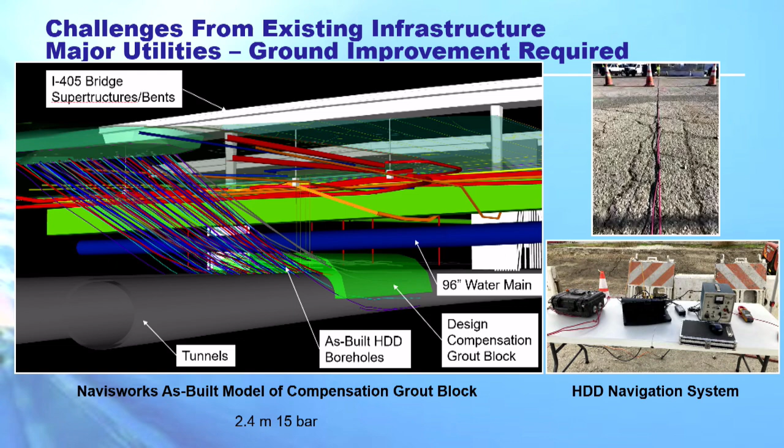Another part of the project on section 3, we ended up with soldier piles beneath a building for the temporary support of excavation, and we had some old as-built drawings that were a bit dodgy, so we needed to get our tunnel as high as possible so we could get the pressure below 4 bar, so we could do successful interventions. I'm sure Donald Lamont can explain all about that if anyone's really interested.

What we did is we put some boreholes next to where the piles were, hit the top of the pile, and used a gadget to determine the depth of the concrete. And then we stuck a magnetometer down to find the depth of the soldier pile, and with that we're able to raise the tunnels to within a couple of feet of these soldier piles, and we tunneled beneath them where no one noticed them at all, so we got that right.

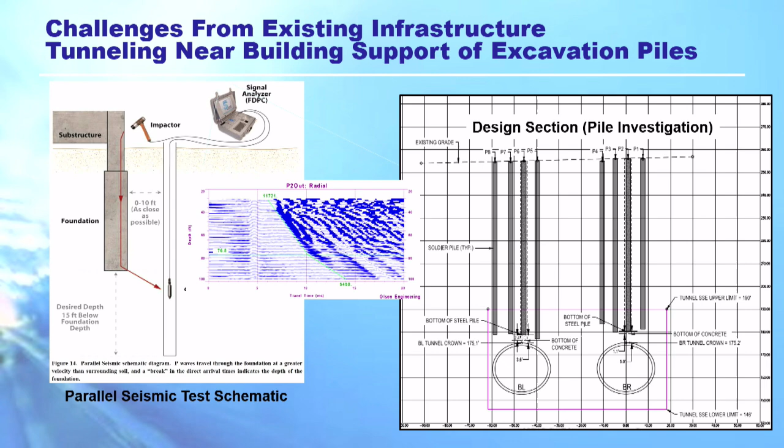We put this in, bit of whimsy: this thing here, it's actually an old bank vault. This is where we were building the entrance to one of the stations, and we had a differing site condition, which was we found an old adit that had been backfilled, and it turned out that this was from a robber's tunnel that was built in 1987 to rob 3 bank vaults, and the robbers robbed 2, and then I guess they were thinking maybe come back another day for the 3rd.

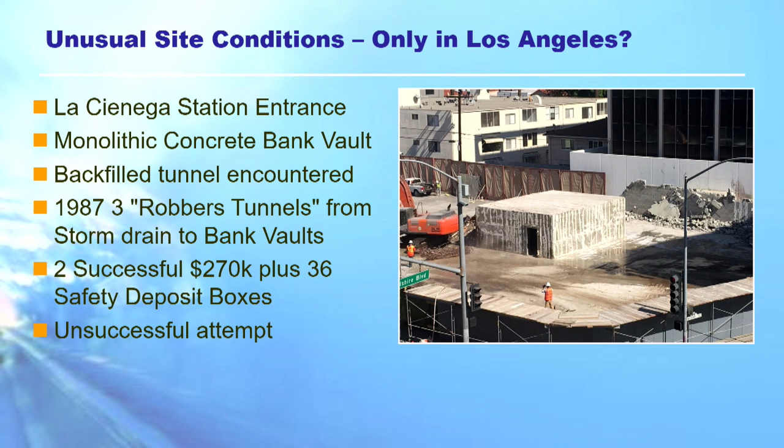Future projects. We're almost done now, but I know people want to know future projects. So I've got 3 that have tunnels. I've got loads of other work, all sorts of stuff, but 3 have tunnels: the Sepulveda Pass, the K-Line Northern Extension of the Crenshaw project, and the E-Line extension to East Los Angeles. That's an extension of the project Amanda was talking about, the Gold Line.

Sepulveda Pass, again, what do we mention here? There's the west side and the LA basin. There's San Fernando. These are the big mountains here, and this is where the traffic is. It's all stationary most of the day. So there's tunneled options for all sorts of things. Look on the website if you're interested, it's really good information there. But we're doing preliminary engineering and site investigation, and as you can imagine, the site investigation for 5 miles of tunnel through a mountain is like someone's project.

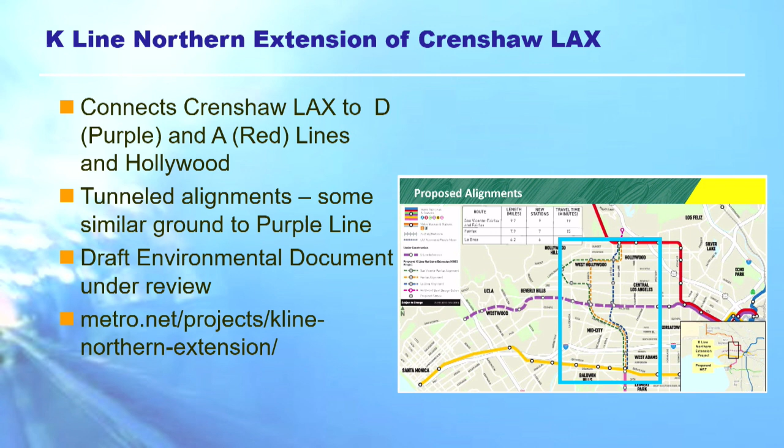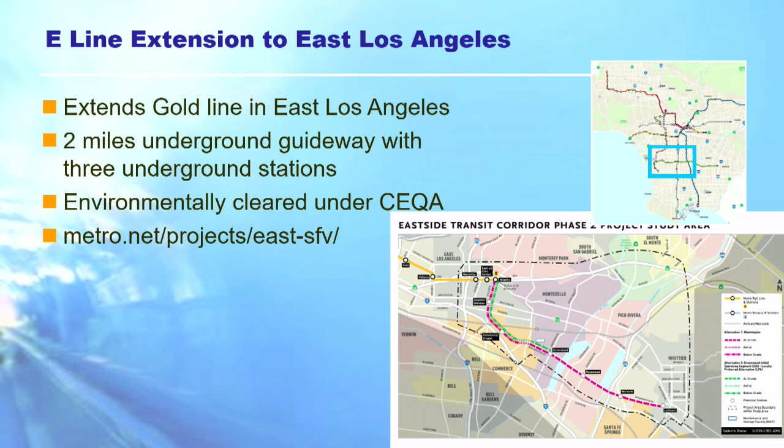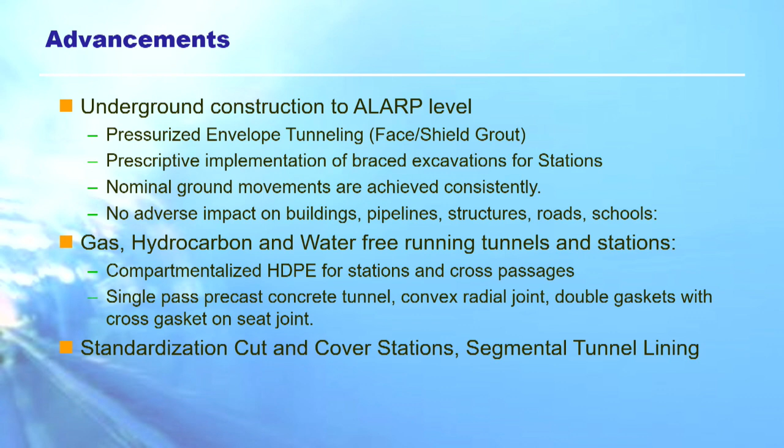Lessons learned, discernment, research. There's obviously a litany of case study technical papers and vanity presentations like this one. We also have a whole bunch of academic studies. We're working with University of Illinois, Lehigh and Long Beach, and they've been studying the pressurised envelope of tunnelling, shoring stiffness, looking at exploratory shaft tar properties. And I sit in these meetings and they do this thing called generative artificial intelligence with the TBM data. But they publish proper academic papers, which is really good. And then we also use some of these things to revise the Metro Rail design criteria and standards.

So concluding remarks. Los Angeles has a world-class rail transit system that will support the 2028 Olympic Games, as well as generally supporting this great city of Los Angeles. The other one is, I'm gonna really understate stuff: incredibly challenging conditions. When I came back to LA 12 years ago, people said, oh, you can't do tunnelling through that, it's impossible. But what we found, if you do all the sound engineering and the homework, you can have successful execution even in these challenging conditions without any mishap.

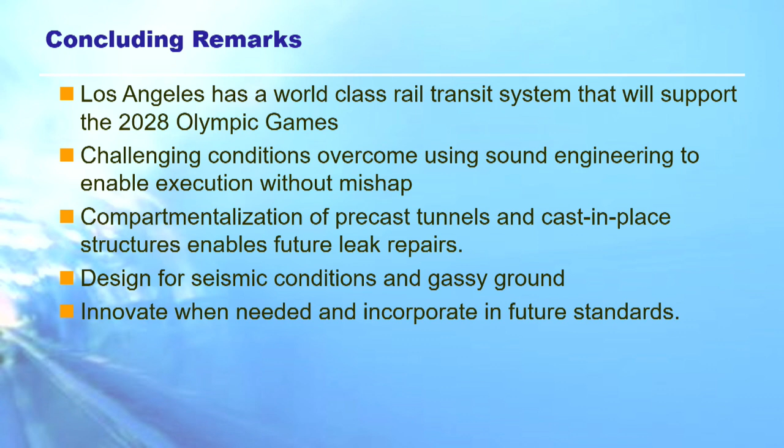And now for the Oscars. I need to get this right, so it's not like a wedding where you've missed someone out. So don't be shy. Anyone who worked on one of these LA projects, or their firm did, give a wave, and if I miss someone, shout it out, okay? So we've got AECOM, Atkins, WSP, Arup, Jacobs Engineering, Dr. Sauer, Aldea, Motts, Fugro, HNTB, London Bridge did a bit.

Any other firms work there? Who? In LA? No one? Who? You got them all. Did I? Wow.